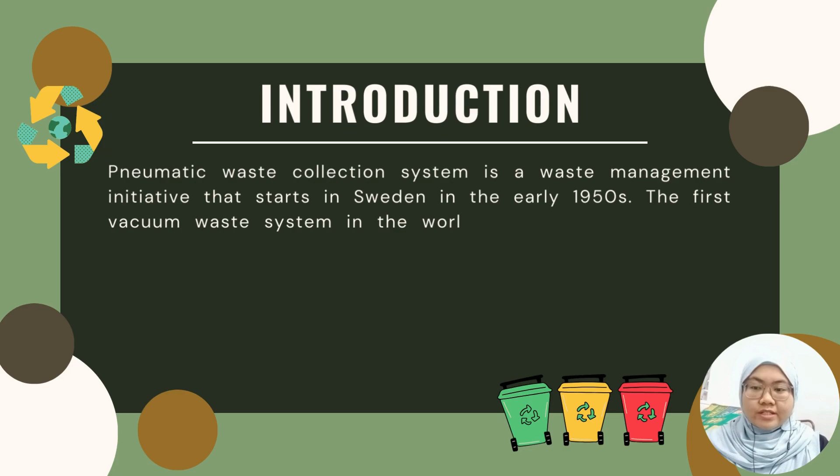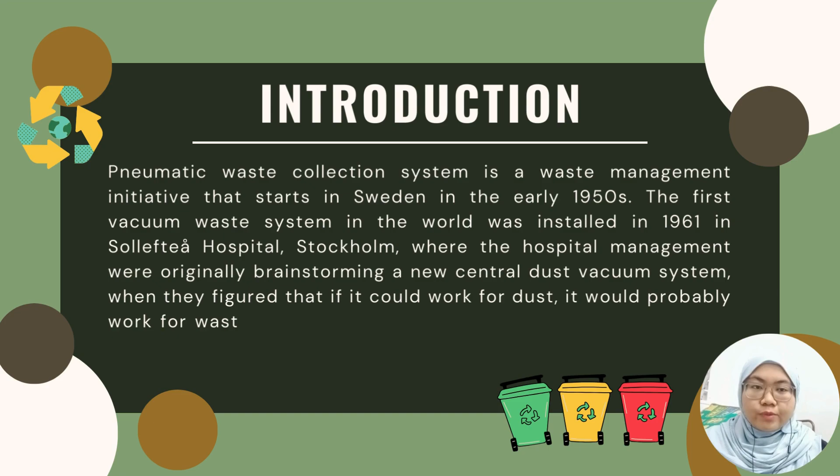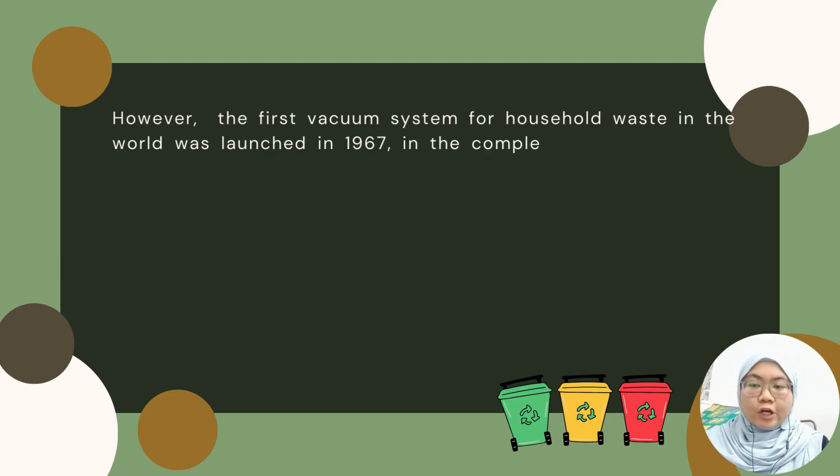Historically, the Pneumatic Waste Collection System is a waste management initiative that started in Sweden in the early 1950s. The first vacuum waste system in the world was installed in 1961 in Sollefteå Hospital, Stockholm. The hospital management were originally brainstorming a new central dust vacuum system when they figured that if it could work for dust, it would probably work for waste. The system is still in operation today with many original parts from the early 1960s. However, the first vacuum system for household waste in the world was launched in 1967 in the completely new residential district of Ör-Hallonbergen. The system is also still in operation today.

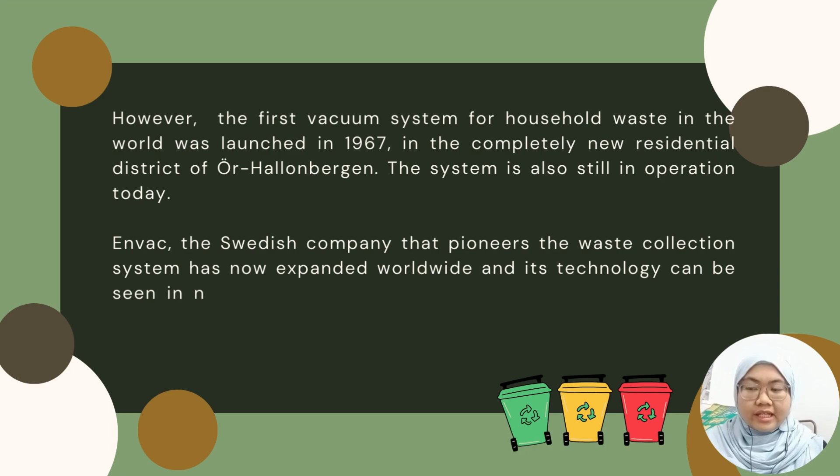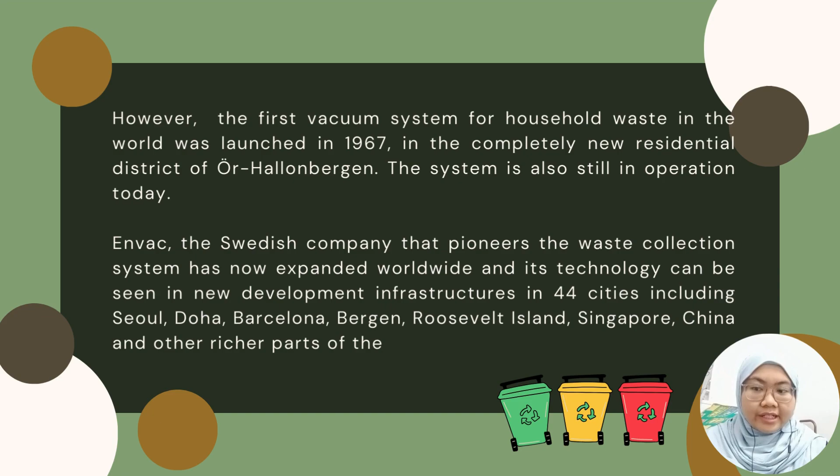Envac, the Swedish company that pioneers the waste collection system, has now expanded worldwide and its technology can be seen in new development infrastructures in 44 cities including Seoul, Doha, Barcelona, Bergen, Roosevelt Island, Singapore, China and other richer parts of the world. Let's move on to the idea of the innovation.

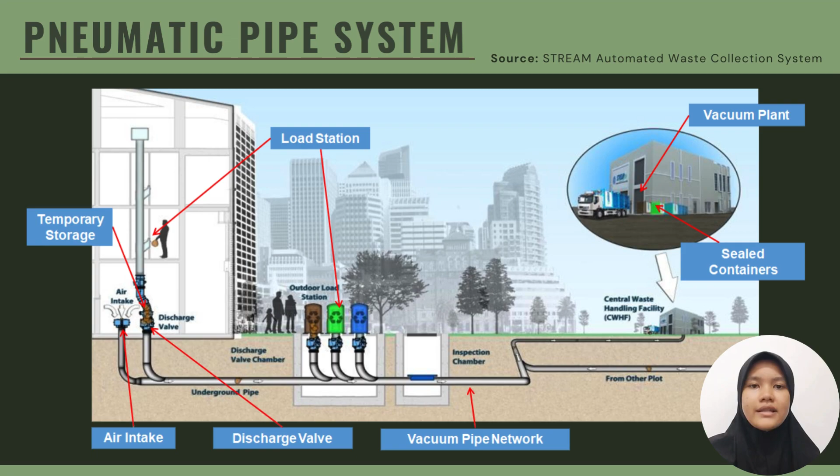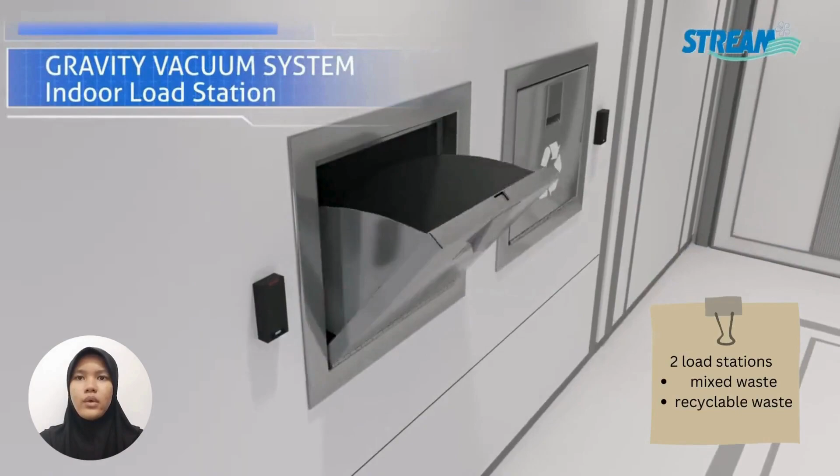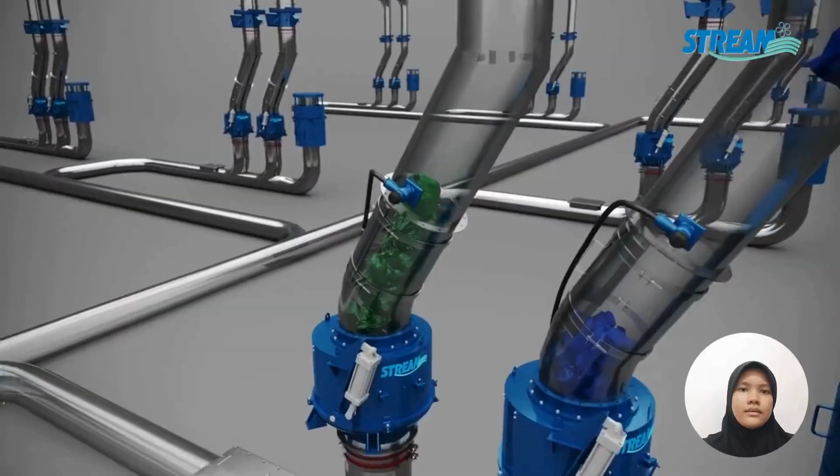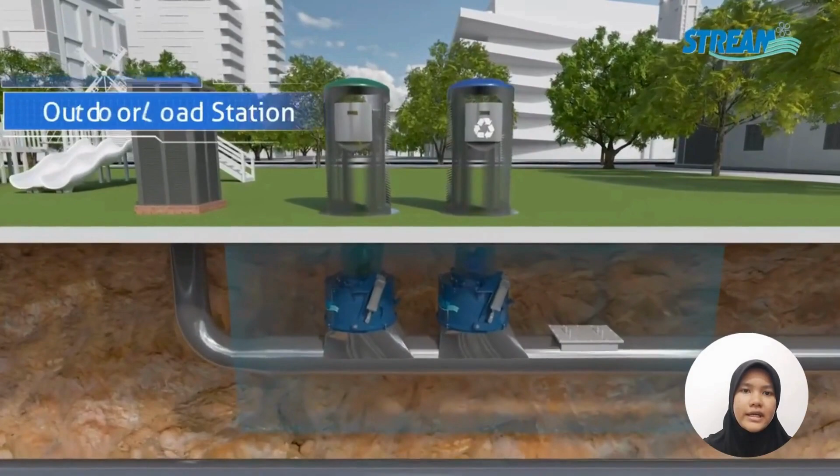Pneumatic pipe system consists of load stations, temporary storage, air intake, discharge valve, vacuum pipe network, and central waste handling facility which have a vacuum plant and sealed container. The throw points or load stations are positioned within buildings and private spaces where waste enters the pneumatic waste collection system pipe network. The tubes connect all the levels of the buildings to the discharge valves in the basements. The computer system controls the opening and closing of the doors automatically, and the option of using a level sensor to indicate a threshold achieved is also included.

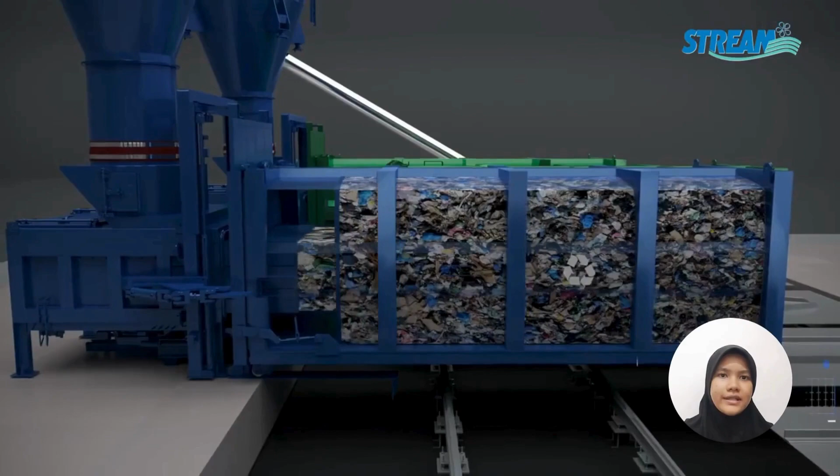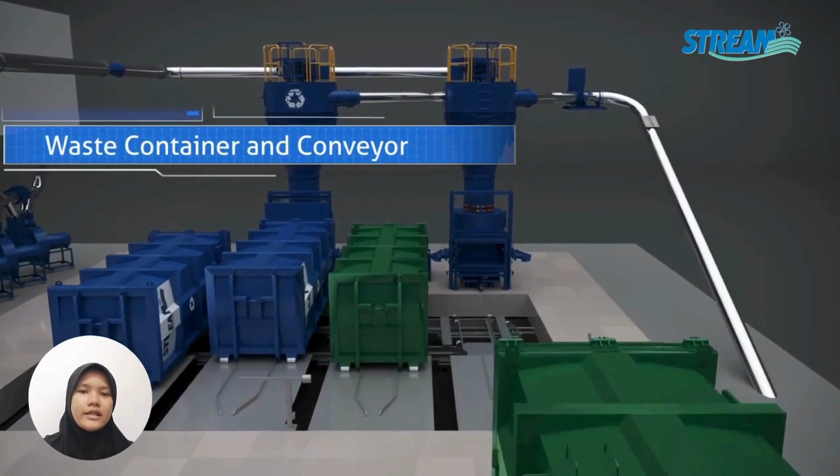After that, the waste will enter the central waste handling facility and be compressed by the waste compressor. To ensure dust-free and odorless operation, the air that carries the waste is treated in a multi-stage filtering system. Once the waste container is full, the container is moved by a conveyor and a truck transports it away for final treatment.

There are several advantages of this system. Firstly, for the user, the service will be available 24/7. They will also improve the public hygiene condition due to direct disposal of waste from residential areas. The inlet for waste deposition is also safe, ergonomic, and accessible for every user, including those with physical limitations.

Next, for safety, they allow selective collection at the source since waste can be separated and disposed of in different fractions. They are also more clean and environmentally friendly due to the fact that waste collection trucks are taken out of the city, reducing the noise and air pollution from carbon dioxide emissions. The lack of waste collection trucks also reduces traffic within the city, creating an image of responsible, neat, and environmentally committed city.

Lastly, for the economy, this innovation will save the user and the city urban cleaning costs as there is a reduction in waste collection operational costs. The truck takes just one trip from the collection point to the dump or recycling facility instead of making the rounds and stopping at every home and business in the neighborhood. This new infrastructure has also allowed the city to keep track of waste production by each location or building and implement a pay-as-you-throw tax scheme which charges residents based on the amount of waste they generate.

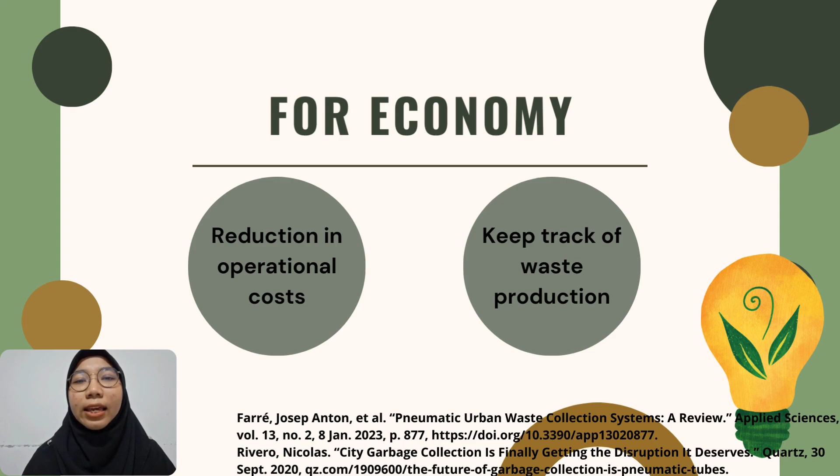According to Carl John Everhold, head of the Bergen Waste Management Department, from one of the cities implementing this innovation, the user will unconsciously take the initiative to sort and reduce the amount of waste generated in order to reduce the tax.

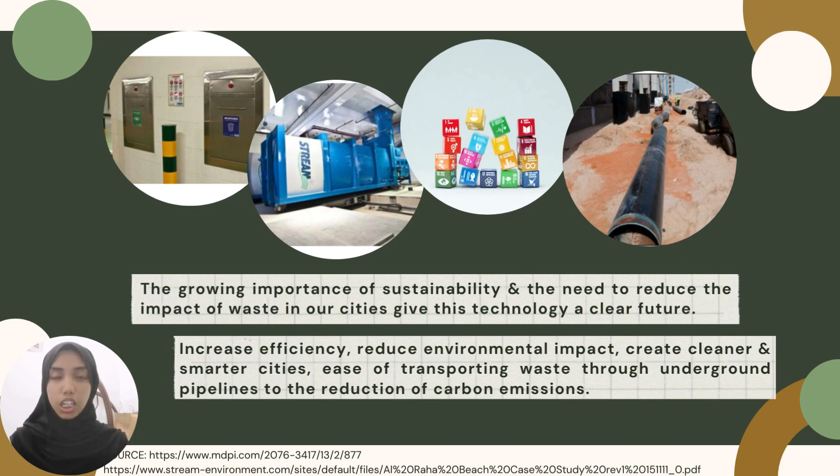In a nutshell, the pneumatic waste collection system is a game changer in urban waste management. The growing importance of sustainability and the need to reduce the impact of waste in our cities give this technology a clear future. We look at how this innovative system could increase efficiency, reduce environmental impact, and create cleaner and smarter cities. From the ease of transporting waste through underground pipelines to the reduction of carbon emissions, the benefits are undeniable.

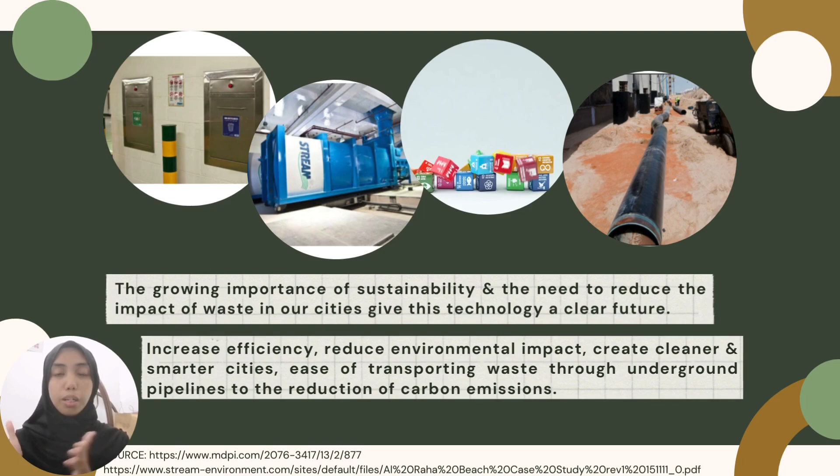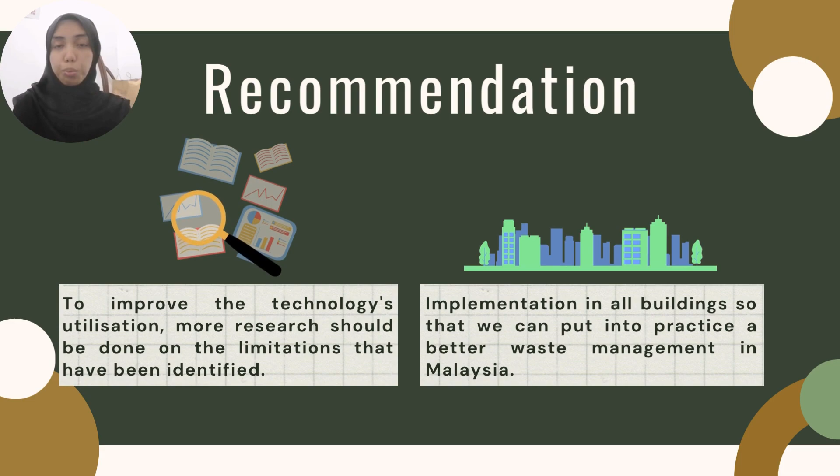It is recommended that to improve the technology's utilization, more research should be done on the limitations that have been identified, such as pipe failures and energy consumption. Furthermore, this technology is recommended to be widely used in all buildings such as residential areas, commercial places, offices, and many more, so that we can put into practice better waste management in Malaysia.